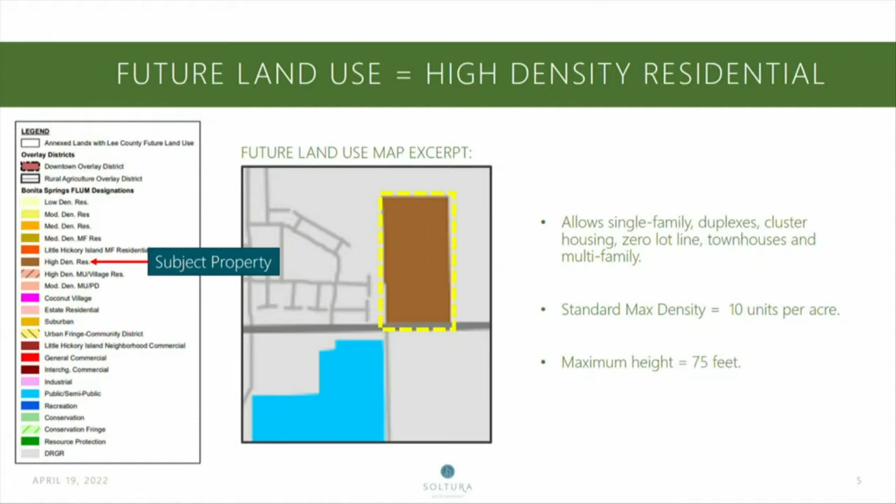The current zoning is Eagle Lakes RPD. It was rezoned back in 2008, allowing development of 200 dwelling units at 10 units per acre per the future land use designation, with a maximum height of 35 feet. You can see on the property there are a number of multifamily residential buildings along the west, north, and south property lines.

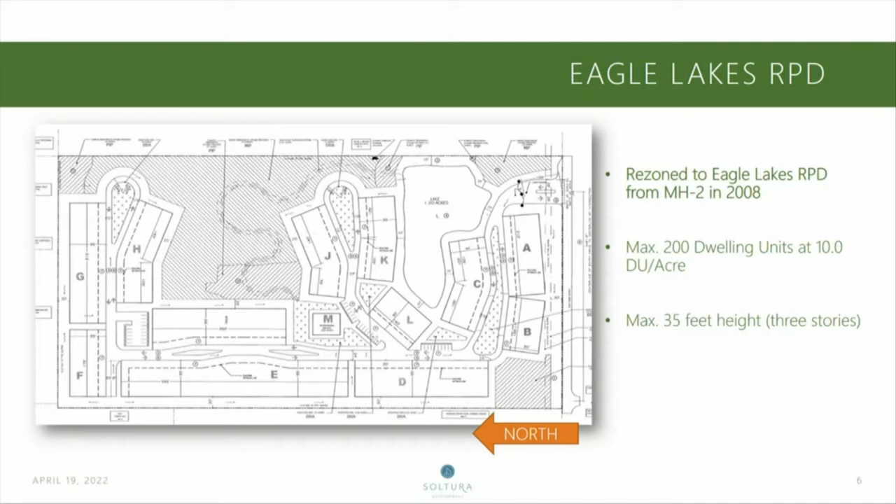Our request today does not include any increase in density or height. We're sticking to that maximum of 200 dwelling units and 35 feet, limited to 1 or 2 stories.

We're really just modifying the layout to accommodate this multifamily development and updating the site layout due to the nature of the development. We're including 4 deviations related to parking requirements, lake setbacks from the right-of-way, lake sinuosity, and perimeter setbacks, modifying the master concept plan to include these changes.

There are, we think, quite a few improvements in this master concept plan over the previously approved plan. We are requesting fewer deviations, so improved consistency with your land development code. We're providing for multiple points of access, and we're actually increasing the open space over the currently approved plan and improving the stormwater management for the site.

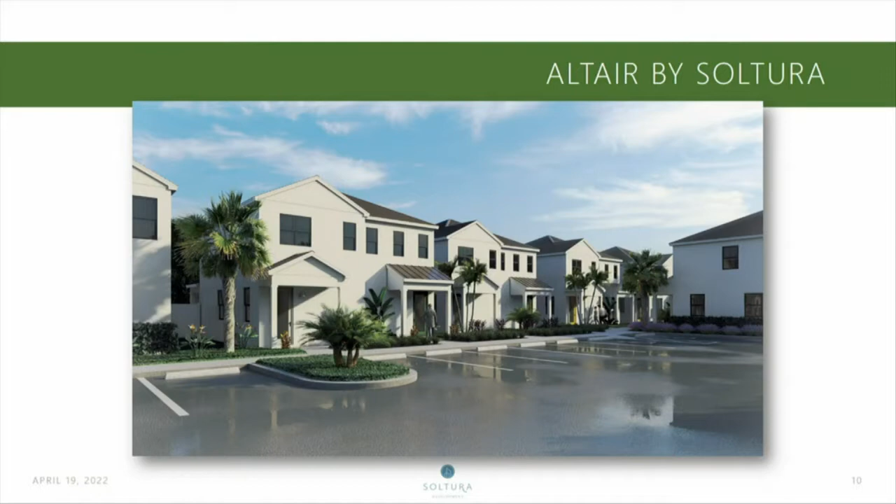Some examples that I'll run through quickly of other cottage apartments that Soltura Development has begun development on. Here is Altair by Soltura. You can see a couple of multifamily buildings.

Going through these quickly, again we're going back and forth between Altair and Odyssey, and you can get a sense for what this community will look like on East Terry as well.

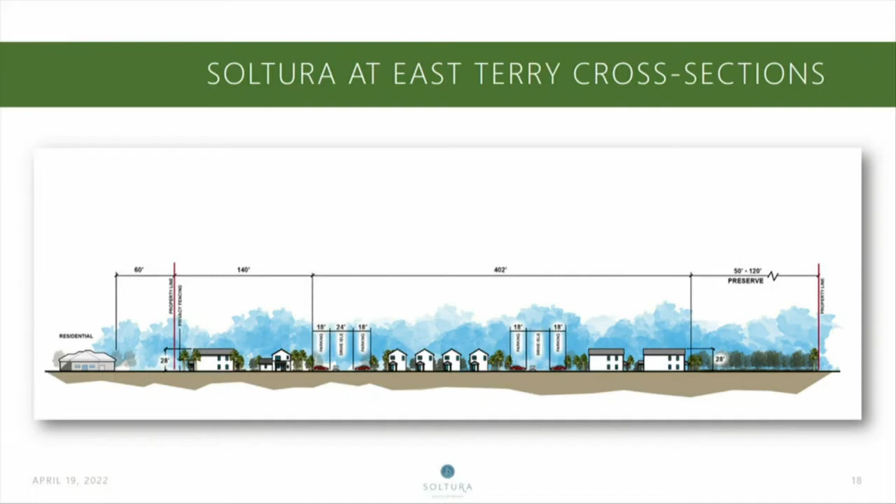And here you can see the same idea running north to south, so you can see where there is a buffer to East Terry, lakes in the southern area of the property, and then the home sites throughout.

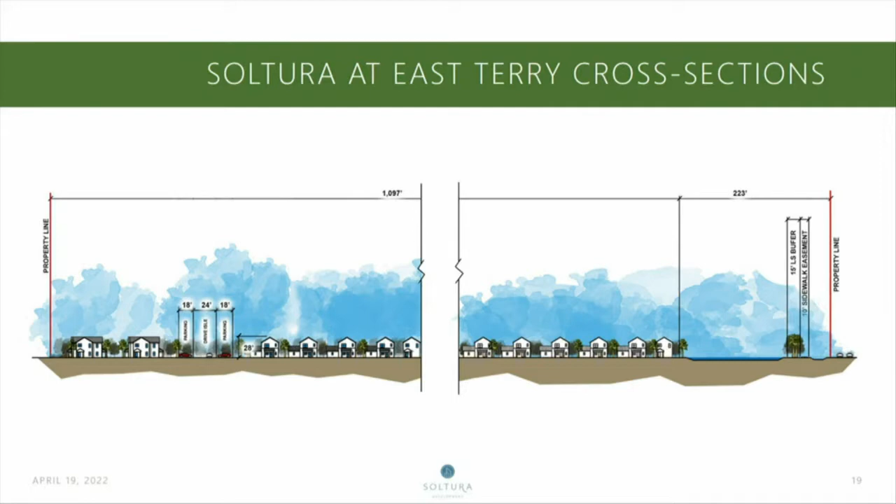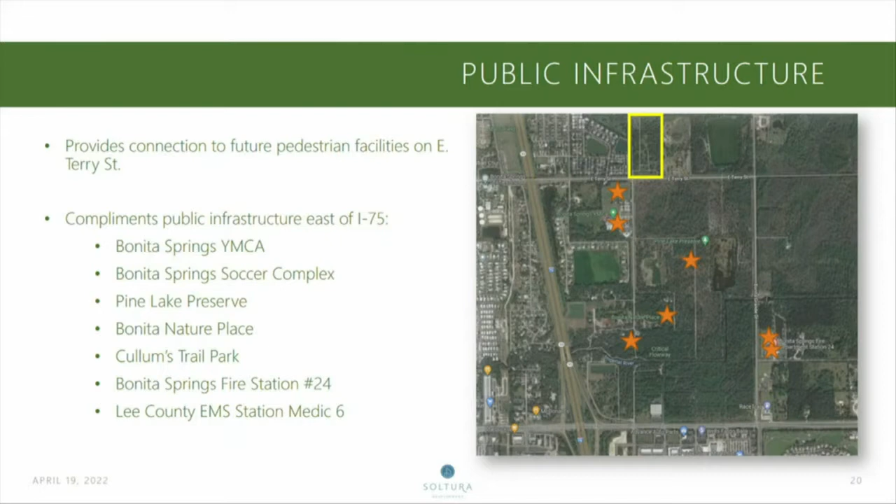The location for multifamily high density is pretty ideal here. You can see a number of public infrastructure sites nearby, including the Bonita Springs YMCA and soccer complex just to the south of the property. Pine Lake Preserve also to the south on the other side of Kent Road. Bonita Nature Place in that same area, and Cullum's Trail Park. The fire station and EMS Center are on Bonita Grand. And beyond the public infrastructure along Bonita Beach Road, east of I-75, there's quite a lot of commercial, office, non-residential development that this Soltura development will be able to take advantage of and utilize.

We held 3 neighborhood information meetings in August, January, and most recently in February at the Bonita Springs Fire Rescue Building on Bonita Grand. We had a few people at each meeting and received comments and questions about environmental considerations, traffic, and stormwater. We worked with those individuals and with staff to narrow down these issues, and I think you see that reflected in the agreement on most of the conditions between staff and the applicant.

So the only 2 conditions that we are not in agreement on, as Mike mentioned, are the traffic conditions. I'll run through a couple of slides that we had prepared, but I don't think we need to get to. If you have any questions, we can come back to these and skip right to those transportation slides.

And for that, I'll bring up Ted Treesh with TR Transportation. Good morning, Ted Treesh with TR Transportation Consultants. We prepared the traffic analysis as part of this application.

As you know, it's quite an extensive process we have to go through for the traffic analysis for the city. We have a methodology meeting and notes with the city that we exchange with the city's traffic consultant. We conduct the analysis and address comments that are issued by the city to get to this point.

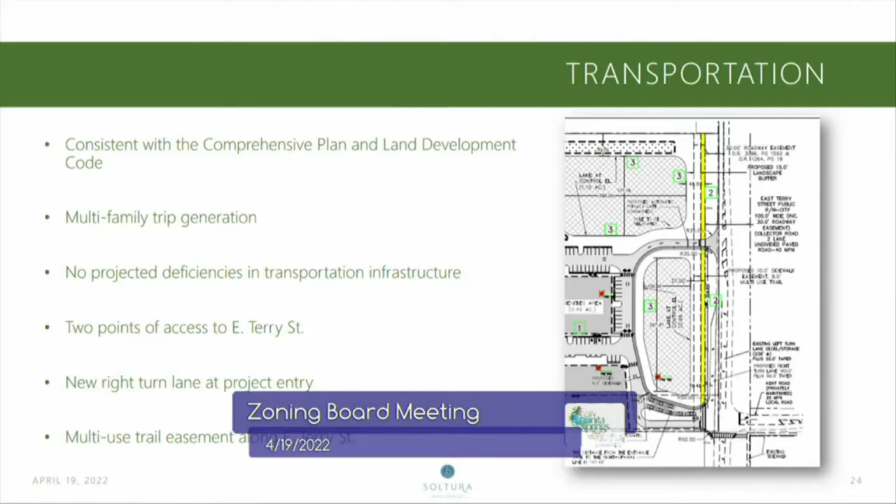As Jeremy indicated, this product is a multifamily product, it's your typically multifamily land use. What we utilize in doing our traffic studies is the ITE, the Institute of Transportation Engineers Trip Generation Report. That's what's generally accepted, that's what we've been using in the city for a number of years. We simply use the multifamily trip generation category for this land use. But because it doesn't look like a multifamily use, there were some questions raised by city staff on whether this is truly a multifamily project, and whether it will generate traffic consistent with a multifamily project.

Just some other points, as Jeremy indicated, there are 2 points of ingress and egress onto East Terry. The eastern access, shown at the top of the drawing, is an exit only onto East Terry, so residents only will be able to exit out onto East Terry. The entrance will be opposite Kent Road, basically creating the 4th leg, or the north leg, of the Kent Road intersection. As part of that intersection improvement, we'll be putting in a right turn lane on East Terry, so as you're coming from Bonita Grand, there'll be a right turn lane to utilize to enter that right turn lane and enter the site access drive.

It'll be a gated community, and we meet the stacking requirements of the gate per the land development code. Everything else in the application in terms of transportation, we're in compliance with the comprehensive plan and the land development code. In terms of impacts and level of service on the area roadways, we meet the standards as indicated in the staff report. The one real issue came down to, from a trip generation standpoint, is this truly a multifamily project?

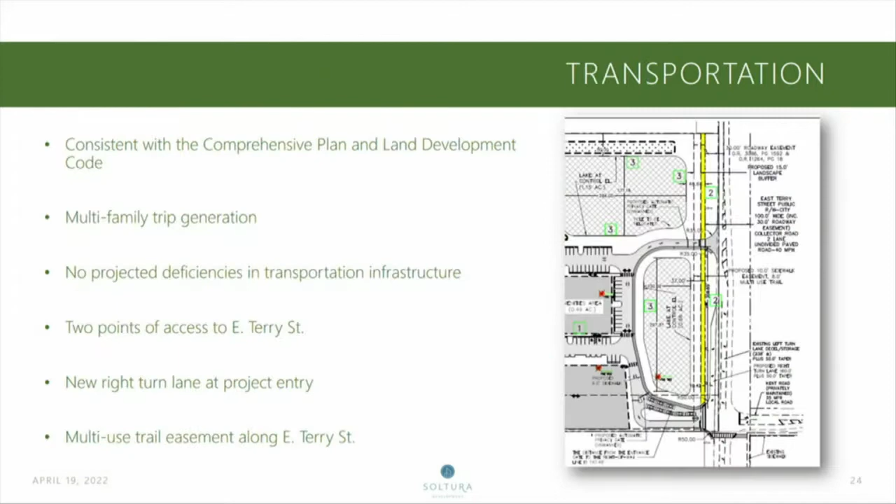So there are 2 conditions that were placed on the staff report that we're in disagreement with. The first is condition 5.

Let me just read what condition 5 says. It says, at the time of local development order, the applicant shall submit, along with the TIS, an intersection control evaluation study for the Kent Road, East Terry Street intersection. Again, at the time of development order, we have to do another traffic study pursuant to the codes of the city. We have to have a methodology meeting, again, with the city staff. At the time of DO is really when you know exactly how many units you're going to build, so it's a more specific analysis that can be done at the time of development order.

The intersection control evaluation study, commonly referred to as an ICE study, was developed by FDOT. You can see this is the cover of their manual, developed probably about 4 or 5 years ago, to look at projects on highways, roadways, and intersections going through improvements, specifically if you were looking at doing a traffic signal.

There's a number of different intersection design alternatives now available that have been looked at. There's roundabouts, there's what's called R-cut intersections. You've seen a number of interchanges being redone now with different configurations. So the ICE manual was the direction by FDOT that before you install a traffic signal, let's evaluate other options to see if anything is a better option for an intersection.

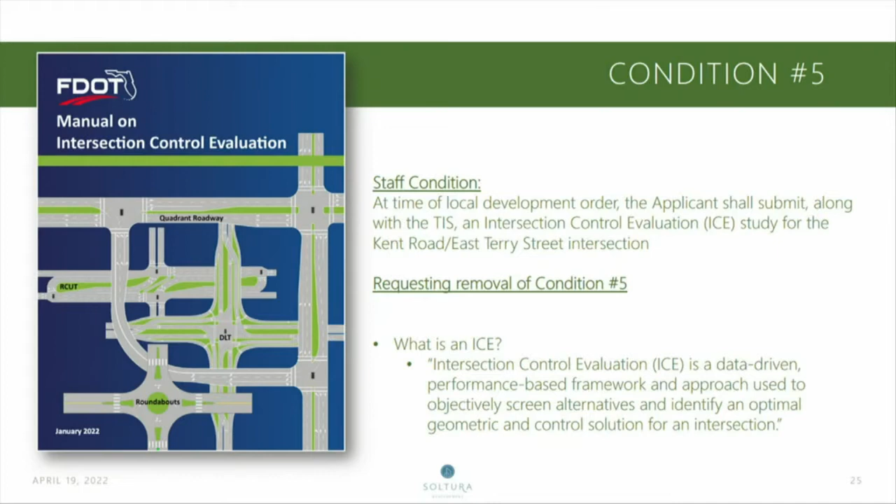It's very data intensive. These are just some of the analysis sheets that go into looking at what an ICE evaluation is. There's quite a number of factors that go into an evaluation. There are several steps you look at. Once you get through one step, you look at going into the next phase, depending upon the results of the analysis. In terms of the requirements currently in place in the city for a development order, in my opinion, this would more than double the requirements of what this applicant would have to go through.

Which intersection? This is at Bonita Grande and Kent Road. Sorry, I mean East Terry and Kent Road. That's very confusing. East Terry and Kent Road. You've been talking about Bonita Grande, and what we're actually talking about is Kent Road. I'm talking about East Terry and Kent Road. If I mistakenly say Bonita Grande, I apologize.

May I understand that your main objection to meeting this condition is that it's going to require extra work on your part? It's quite a bit of extensive extra work that's not required in the current codes in terms of what a TIS has to evaluate at the time of the development order. So basically, it's just extra work.

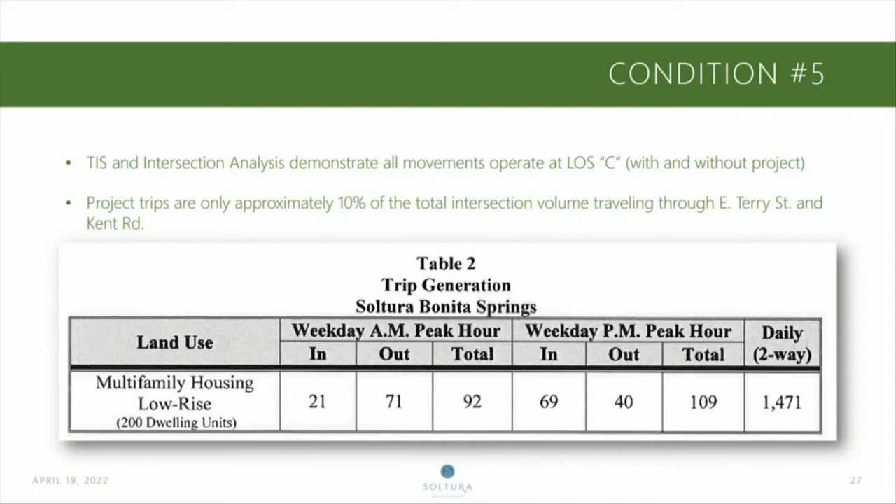Again, these are just some of the spreadsheets you look through. The second issue was regarding trip generation for the project. Our analysis showed the intersection of East Terry and Kent will operate at level of service C. All movements will operate at level of service C, well within acceptable methods and operational analysis. This table shows the trip generation of the project as a whole based on the multifamily use. It's a very low trip generator compared to other uses, even compared to a single-family product.

In order to alleviate some concerns staff had regarding trip generation, this goes to condition number 6, which we also have an objection to. Condition number 6 says at the time of local development order, the applicant and the city will agree on appropriate traffic monitoring provisions. We're not quite certain what those appropriate provisions are. The codes adopted by the city right now don't have any such requirements, so this condition is being put on this project.

The only other project I'm aware of with something similar was the recent approval of the facility next to the card room, where the dog track was taken down. With the entertainment facilities going in next to the card room, that facility was something new and we didn't have any trip generation data for it. I did the traffic study for that project, and there was no such trip generation data because there's no facility like that in the country. So it was first of its kind. The city put a transportation monitoring condition on that project because we simply didn't know the trip generation characteristics of that type of use.

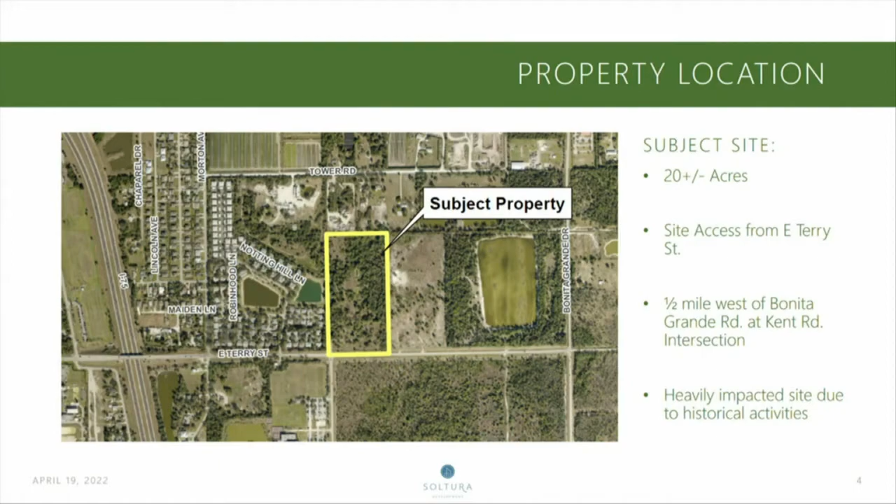So did I hear you say that this is only going to increase traffic 10% at that intersection? Our project is approximately 10% of the total intersection volume at East Terry and Kent Road. Well, who else is using the intersection if nobody lives out there?

Can I interject here? Yes. If you go East Terry, cross over Bonita Grande, there are several homes out that way.

There's a horse farm out there, so there are some residents out there east of that. On East Terry is a dirt road. Some large acreage, some other homes out there, very small though, sparse. It's not a development, just a whole lot, you know.

To answer your question, the volume on East Terry is primarily commuter traffic from the east. Logan Boulevard connects now to Bonita Beach Road. They come to Bonita Grande north and use East Terry to travel west to get to downtown Bonita, Old 41 corridor.

Can I make another comment? We own the church out there, about 8 acres, and we have our office out there. As you're saying, the volume that's coming in is from all that development east of Bonita Beach Road, and they have found a little shortcut. So that's where that volume's coming in. Instead of going straight down Bonita Beach Road, they go down to Bonita Grande, make that little shortcut, East Terry, hit Imperial that way. So you got this line of traffic, especially in the morning and evening.

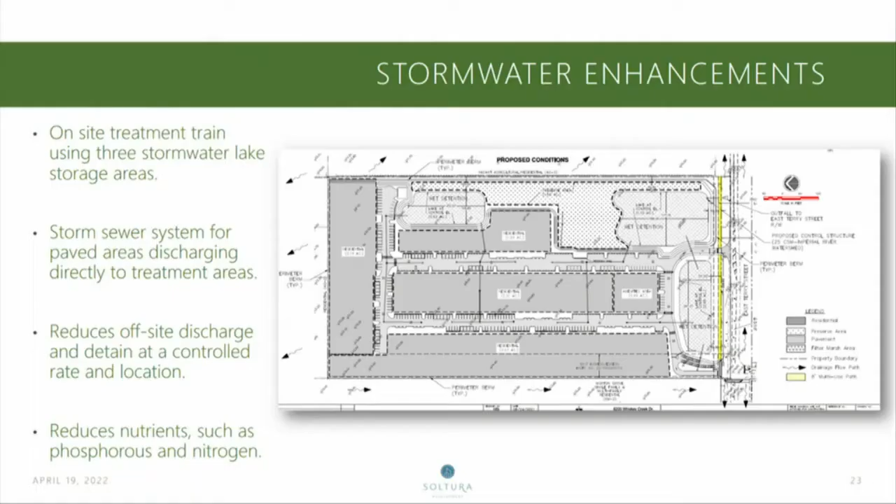And the other note that I had in regard to that, the parking spaces per dwelling unit here is 1.89. So 1.89 parking spaces per dwelling unit. And in Lakewood Ranch, which you talk about a lot, there are 2.8 parking spaces per dwelling unit. Why do you have such a big difference?

It's code driven. So again, the multifamily code in Lakewood Ranch is different than the code we're dealing with. What I gave you is the City of Fort Myers code, which is what I'm doing in the city right now. It's also the Lee County code. I think the city has adopted Lee County codes, but I don't know offhand, so I'm going to guess.

But you just said, what, 1 point on average? So basically what that means is you take a projected mix of homes, 1s, 2s, and 3s, and you come up with an average. So I think our current projection based on the master concept plan gets you to that somehow, some way. So I was going to point, but I don't have a pointer.

You don't have a laser pointer up there? No, I don't have one up there. Where's our audiovisual committee? So these are garages, okay? You may choose to rent a garage here, but you may live back over here. It's an apartment community, just like what you see. I'll use Mosaic as an example. I think they've sold it.

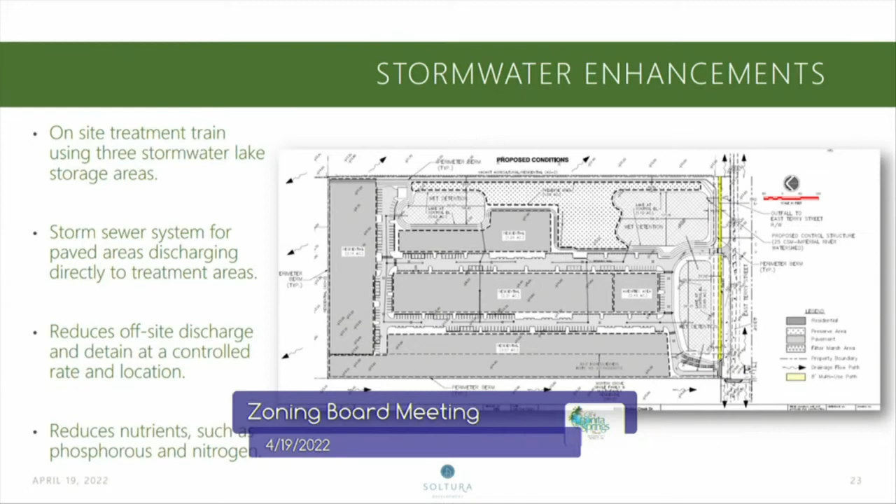It's no longer Mosaic, but everybody's familiar with it, right down the street on Old 41. Okay, so where those white structures basically are. Okay, thank you. Was it the top button? Thanks. Okay, that's great. Okay, I'm back. I was thinking those are islands.

But does that help answer questions? Does anybody else have questions? I know this is a new product, so if there are specific questions... I know you also don't see the sidewalks, and that's because the LDC doesn't require sidewalks internal other than to get to the common space from the outside.

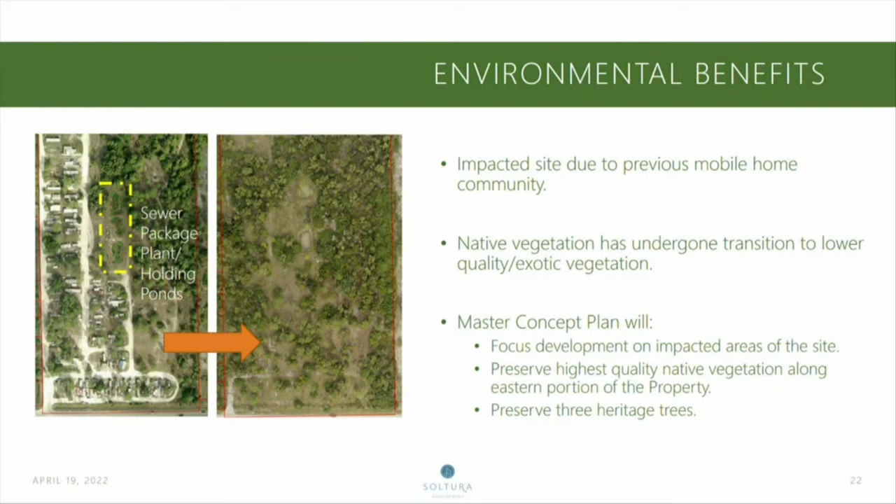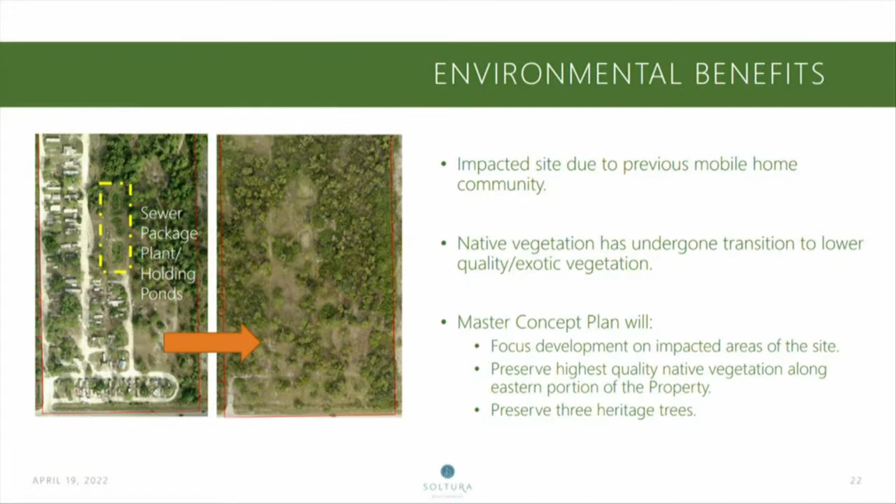Correct. Did I see something about tortoises? Gopher tortoises? I don't know if we have that online, but we will be complying with state and federal requirements for listed species that exist on the property.

Are you finished with your presentation for the entire project? Yes. Okay, I have two pages of questions. For them or for the city? Perhaps for both. Okay, staff can go first. You proceed, you might get your questions answered with the staff. Let Mr. Galloway ask the question in the appropriate way and the applicant will answer. I think the staff should go first and recommend if you have questions for both, whether answered by staff or at the end, it's easier for the appropriate party to respond. You want the staff presentation and then questions? Okay, all right. We'd just like to reserve the right to rebut. No one's gonna stop you. Okay, Mr. Fegan?

Good morning, Mike Fegan again for the record. I will go through a very brief— I think this is mine. Nope, wrong one, sorry about that. Did we break it? No, you didn't break it. There we go, and now I can't see where I'm going. Okay, Mike Fegan with Community Development for the record.

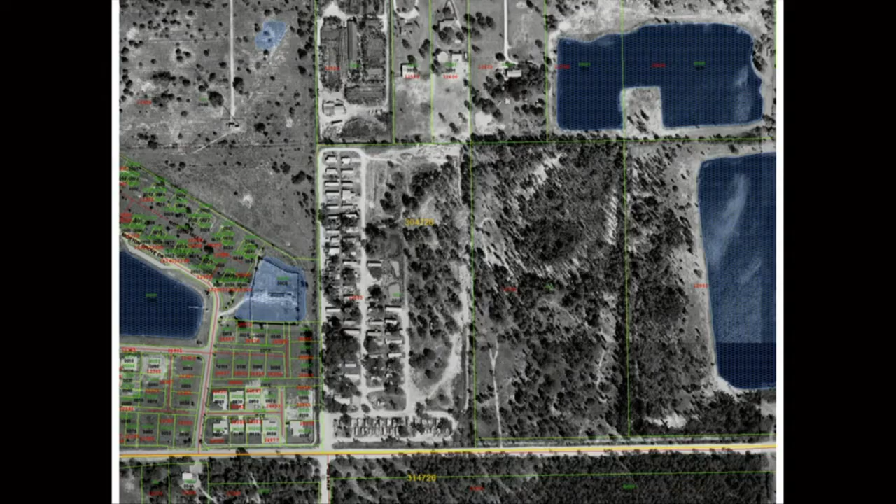And we already went over the master concept plan, but what I want to do is I want to jump to one more slide and show you the proposed master concept plan next to what was on there previously. So to the applicant's credit, one of the things you can see is they're trying to focus the development largely on the areas that were already impacted by the mobile home park. So you can kind of see where there's a natural progression along the south, the west, and towards the middle of the project where the mobile homes were, and that's largely where they're placing their buildings.

You can see on here that the eastern portion of the property was left relatively open and vacant, and that coincides with where they're proposing to put their indigenous preserve area and some of their stormwater management lakes.

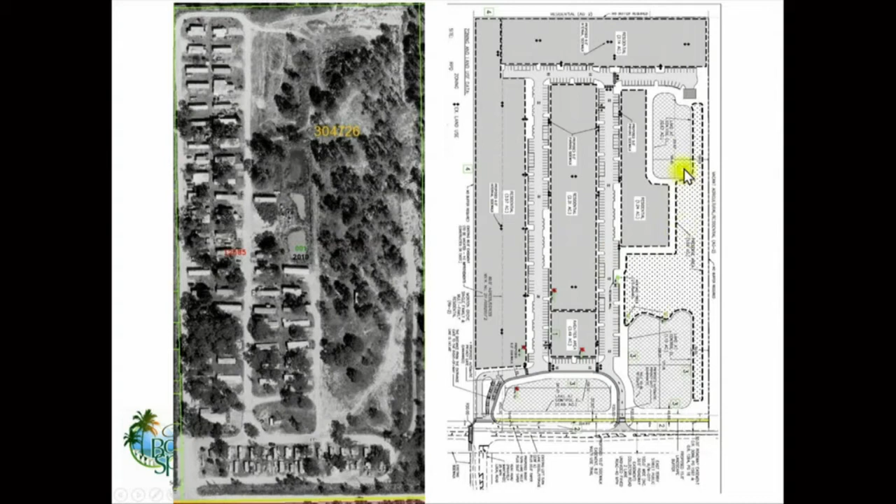With the schedule of uses, I don't think there's really any concerns on that specifically. The uses tend to be customary to most residential developments that we have in the city. The multifamily detached, which is what they're calling this building product, that is a new one for the city. We did ask them to provide a definition for consideration for exactly what that entails. And I think part of the concern stems from the definition that was provided. While we understand it, I think it still led to some confusion about exactly what type of project this was going to be, and as a result of that, what type of traffic it ultimately would generate.

The development regulations are listed on your master concept plan. We don't have any concerns with those development regulations. There is a deviation that has to do with one of the parking regulations that staff did analyze and is recommending approval on, which we'll get to later in the report.

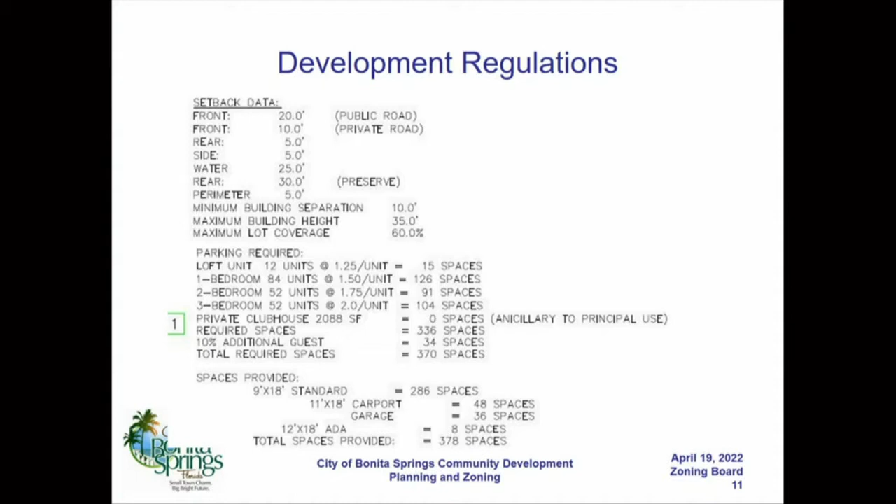With regards to stormwater, part of their 4-page master concept plan does include a proposed stormwater exhibit. And now again, at this stage, at the zoning stage, it's relatively high level and conceptual. The more detailed plan will be provided at time of development order, which is when they provide their final engineering plans. But the overall concept was reviewed by the city's engineering department, and they didn't have any concerns with it. It's going to be designed to treat and hold stormwater on site and discharge at the appropriate rates based on South Florida Water Management District codes and requirements.

And one thing just to keep in mind, because I know at one of the neighborhood meetings there was concerns about stormwater and drainage, which is fine. That seems to be a relatively standard concern with most projects in the city. We do have a requirement that this project cannot cause additional stormwater runoff onto surrounding properties. So where Morton Grove is directly to the west, the water that they receive right now, the water that flows through that property, it cannot increase as a result of this property.

So we do have mechanisms in place that look at that in a more detailed approach at the development order phase. So I'm asking this early, when the ponds fill, when the retention areas fill up, where does the runoff go? Knowing that it doesn't go into surrounding properties, where does it go from there? So I believe based on their stormwater plan, it's going to discharge into the East Terry Street right-of-way. That's its discharge point based on the interconnected channel and pond routing system that we have for the city. It's already in place. Yes.

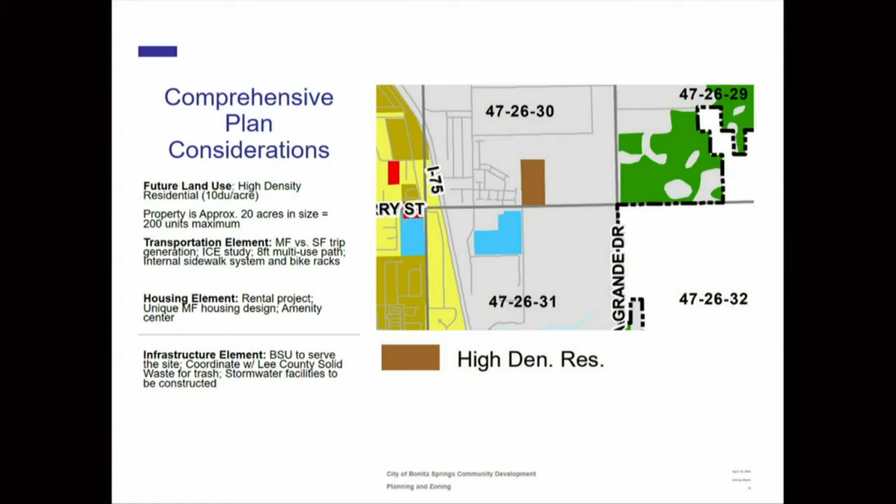For the infrastructure, BSU is going to be able to serve the site with water and sewer. There will be coordination with Lee County Solid Waste for how to do the solid waste removal on site. The other infrastructure element is the stormwater facilities, which they are going to construct in accordance with city regulations and South Florida Water Management District. So we do feel it demonstrated compatibility with all those necessary areas of the comprehensive plan.

With regards to the deviations, there were 4 that were requested. Staff is recommending approval of 3, and we are recommending that one of them be withdrawn. We don't think it's necessary at this stage, but we'll quickly go over those.

Deviation 1 has to do with the parking rate for the amenity center, which is similar to how we park recreational facilities at 1 parking space per 100 square feet of floor area. Their justification was that the site is relatively compact and walkable in terms of the overall design, and because they're providing the interconnected system of sidewalks and many residences are within walking distance to the amenity center, is the amenity center parking rate really necessary at this point?

Staff reviewed it and does recommend approval of that deviation request. We tend to agree that the site is relatively compact in terms of the overall design. On a square mile basis, it's actually less than half a square mile of development area, so it tends to be very walkable. We do have a condition that we want to see additional bike racks placed throughout the development to foster not just walking, but also biking to and from the amenity center.

Yeah, I have a question. Oh, excuse me, quick question. Handicap parking—is that a federal rule, is it applicable here at all?

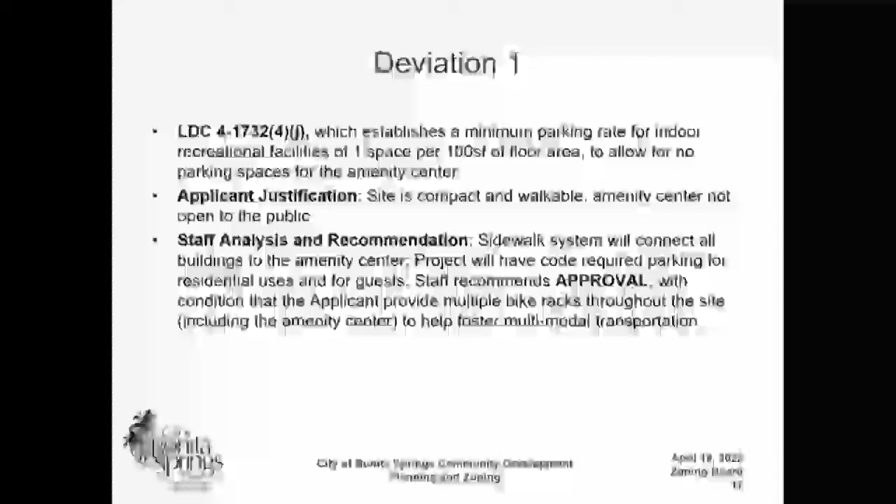Sure, it's done in accordance with ADA, and essentially what ADA says is based on the number of spaces you provide for a project, a certain percentage of those have to be ADA compliant. They don't have to be at the amenity center—they'll be scattered throughout. When they submit their final parking design, we'll request that they put some by the amenity center, per their standards, closest to the main entrance and things like that. It'll all be reviewed as part of the development order, but they're not asking for any deviations or variances from the ADA parking considerations.

Deviation 2 is a deviation from Chapter 3 Standard 3-331, which requires a 50-foot setback from land under separate ownership for lakes or stormwater areas. They wanted to request a deviation to allow just a 25-foot setback from Terry Street.

The justification is that the lake will still be buffered from passing motorists—there's not going to be any real risk of conflict between an errant car and the lake. There are buffers, existing drainage swales, and plantings being proposed. Staff understands and tends to agree with that analysis. However, this is a technical deviation that typically occurs at time of local development order, so asking for it now at time of zoning may not be the most appropriate time. Typically this comes with the final development plan, the final lake cross-section plans, the final drainage plans—the final plans that show the location of the lake specifically. We feel that's a better and more appropriate time to ask for a deviation like this, and that's what the code suggests as well. It's why it's written into the code that way, that you can ask for these types of deviations at time of local development order. So we feel this one could be withdrawn, not because we disagree with it or see an issue with it—we just think it's the wrong time to ask for it.

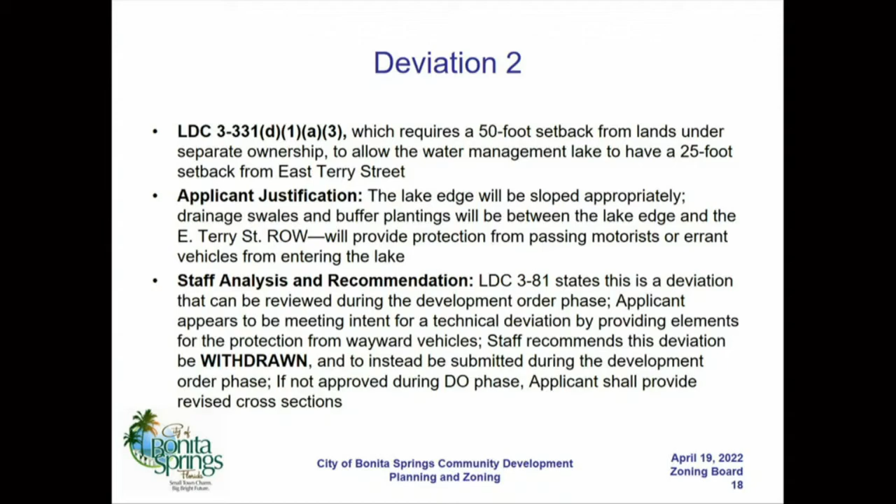But there's a 50-foot setback east, north, and west? Yes, they are meeting that east, north, and west, correct. Thank you. You're welcome.

Deviation 3 has to do with lake sinuosity—the waviness of a lake bank or shoreline as opposed to a straight line. The purpose of sinuosity is to help maximize the amount of littoral plantings you can plant along a lake bank. These plantings have multiple functions for the health of the lake: they filter out nutrients before discharge off-site, and they help prevent lake bank erosion from moving further back toward residential areas. A sinuous design allows you to physically plant more littoral plantings than a straight line would. What the applicant has agreed to do, in lieu of a sinuous lake, is still do sinuous littoral plantings—making the lake bank appear sinuous by planting in an undulating pattern with littoral plantings and grasses.

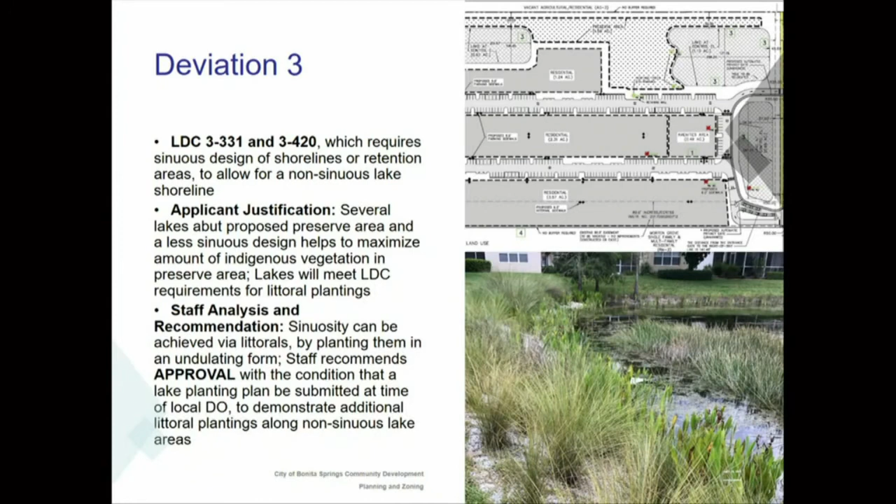As you heard in other projects in the past, these tend to be very, very precise calculations in terms of the amount that each lake should hold compared to the discharge rate of where it goes to its ultimate discharge point. Essentially what they're saying is the design they've come up with is what keeps their stormwater plan in balance. Not to say that that's an unreasonable question, but from the staff perspective, they can achieve the same thing without messing up their stormwater calcs by just planting additional littorals, which they've agreed to.

So do you think that these straight littoral lines are going to contribute to erosion? I mean, that's the purpose of the sinuosity, to prevent erosion, correct? Part of it, it's to allow you to be able to plant more littorals. The littorals are what ultimately help prevent the erosion. So the littorals are still going to be there. But I mean, this planting is not going to encourage erosion?

Correct. And the littorals will be planted in an undulating sinuous pattern to allow more of them to be planted in areas where the lake tends to be a bit more straight. I'm having a problem picturing that. I've got a straight line and then my plants are doing this?

Yeah, I mean, you can kind of see it in the image below where essentially it's a straight line here, but you have plants that kind of jut in and out. In fact, they planted 3 different layers of littoral plantings here to help achieve that same effect of erosion and nutrient control. The purpose of this provision is to, quote, increase the length and diversity of the littoral zone. Right, okay?

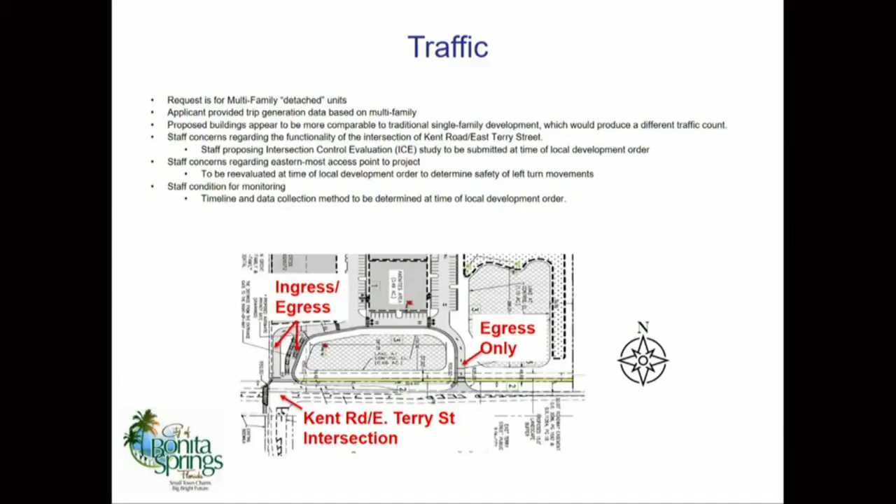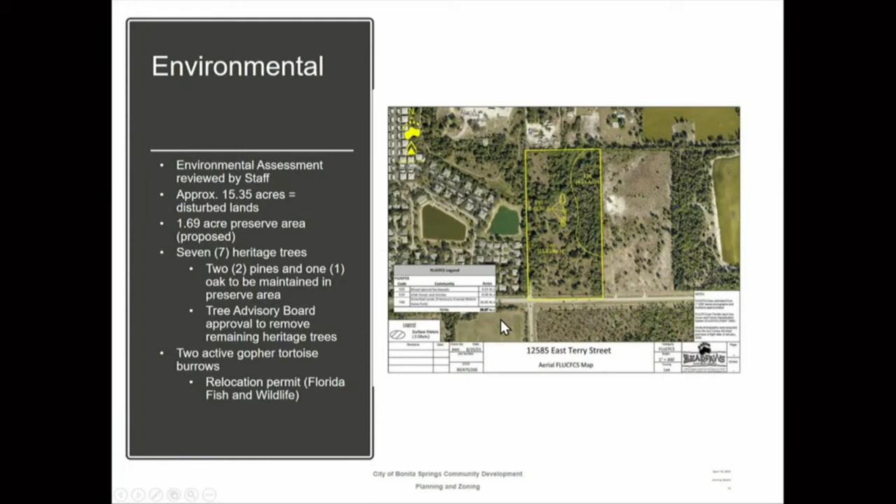Okay, deviation 4. Deviation 4 has to do with perimeter setbacks from a project boundary of 15 feet, and the request is to allow a 5-foot setback on the northeast and west sides. Essentially what's being proposed is that they're trying to develop within the previously impacted 15-acre portion of the site that held most of the mobile home development, the package plants, and the ponds. In order to do that, based on where their proposed conservation and preserve area is located, they're somewhat squished on two sides, especially the north and west, in terms of where they can put their development overall.

Largely this would be for accessory structures, fences and walls. What the applicant is proposing is that if any principal structures are within 15 feet of the boundary, they would provide additional plantings and landscaping to help visually screen the project from abutting properties. When you look at the surrounding properties and how close they're able to build to their property lines, for many of them it's within 5 feet of that common property line anyway. So we didn't see it as an inconsistency to allow development within 5 feet of a shared property line when the person on the other side can do the same thing.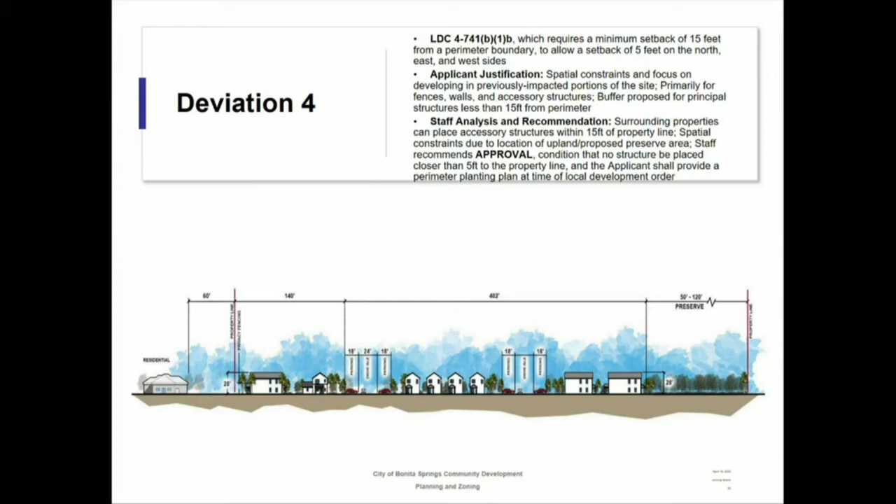We did want to stipulate that it's not just for principal structures per se—anytime anything is within 15 feet of the perimeter, additional plantings will have to be taken into consideration. At time of development order, they'll have to provide a planting plan showing how they'll treat and address perimeters where structures are less than 15 feet from the property line, once they have their final drawings in place.

So with that, we go to the plan. Hang on.

You lost me—Deviation 2 says we need to stay 50 feet away from the property line we share with somebody else. That was for stormwater lakes, a separate deviation just for lakes. Now we're talking about structures, the buildings themselves, being 5 feet away from the property line—mainly fences and walls, but where there are principal structures less than 15 feet, they'd propose additional plantings to screen. Staff's retort was, you're going to do it for anything within 15 feet of the property line.

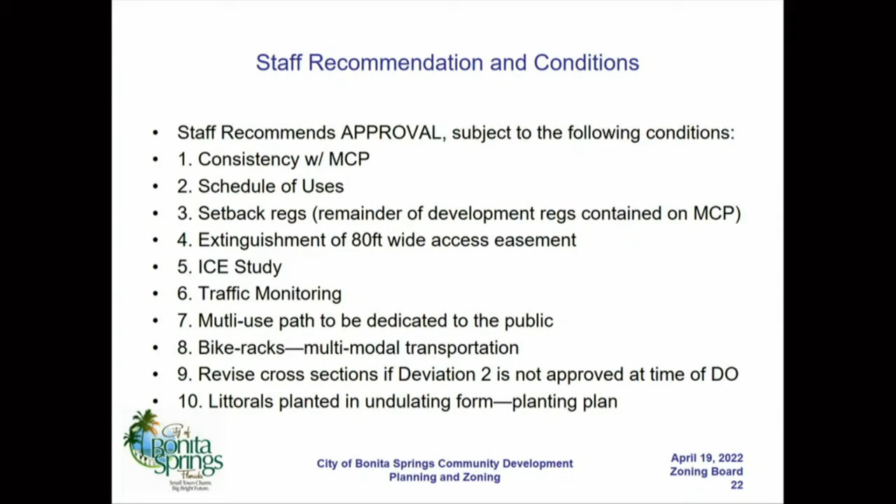Condition 11 has to do with the 5-foot perimeter setback, where they would need to provide a planting plan for anything that is within 15 feet of the project perimeter boundary. Condition 12 has to do with the heritage tree replacement and the ratio for how to deal with the heritage trees that are being removed.

Condition 13 essentially says, unless approved by deviation or variance, you have to meet the city's bike ped code for bicycle pedestrian requirements. And condition 14 says that approving this zoning request does not guarantee development order approval. It does not guarantee building permit approval. It does not circumvent those processes.

So with that, if you have questions for myself or the applicant.

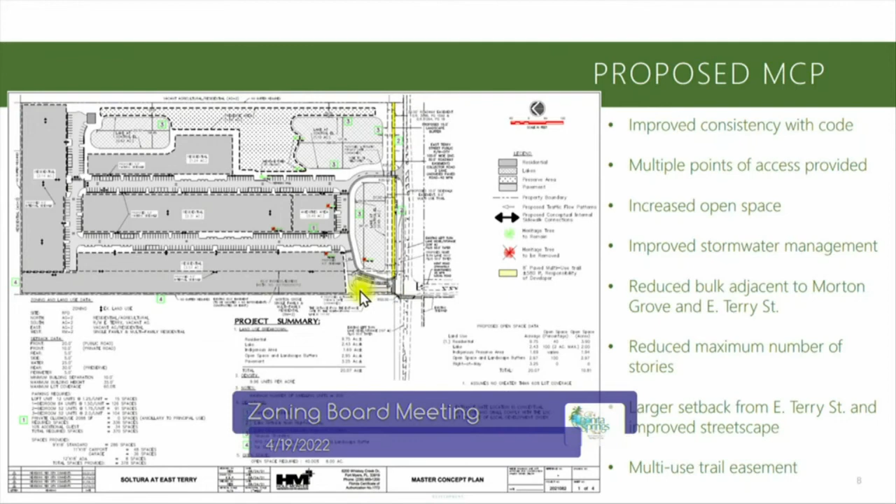So it's quite small here, but if you can see in your packet, there is a depiction of some vehicles there. At the time that we come in for our local development order, there will be an analysis of the queue length that could occur there, and we'll be required to demonstrate that we comply with the land development code at that time. Okay, but we don't have that now. We have not done a queue analysis at this point, no. That will happen at the local development order. Okay.

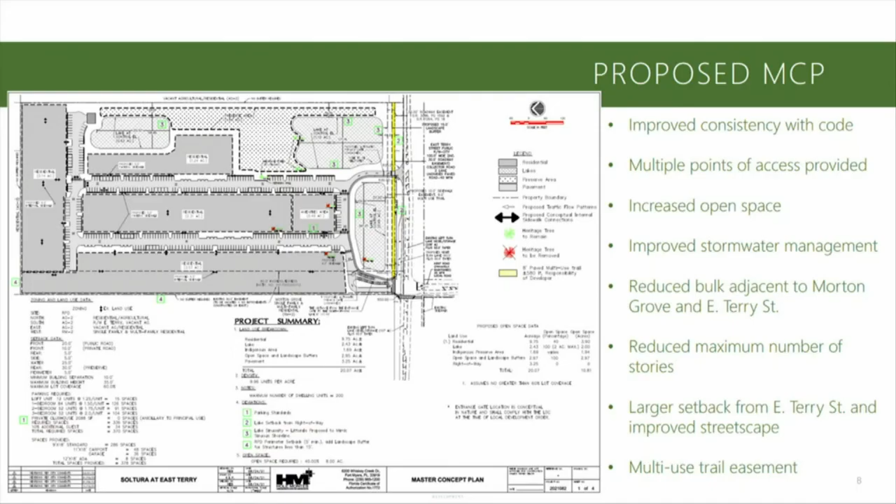Okay, answer the easement question. Is this a site plan? Or can you see it or not? Can I approach? Sure. Is that a site plan that shows the individual houses and access?

What page you got, Bruce? What page is that? I can't remember where I found this. It was in here somewhere.

But the purpose of your question on that is? This is the first indication I've had in all this material of where the houses actually are in relation to each other and in relation to the streets and the parking. It's the only illustration I've seen. It appears to be a site plan, an illustration of what that layout might look like. It's not anything that's been formally submitted to the city.

So the houses are not, no common walls. They showed a picture of a rendering of the houses. And that's what they would look like if all goes according to plan, correct?

Mr. Galloway, the plan that you're referencing was an exhibit that the applicant provided at one of their neighborhood meetings to give the public an idea of one of the concepts for how it could ultimately be developed. I think one of the things they're a little unsure of is what the ultimate final design is going to be, which is why on the master concept plan you see the building areas more as general block-looking patterns as opposed to individual residences. One thing they are more sure of, though, is the overall architectural theme, which is why they provided those elevations for your consideration. But the plan you're referencing was purely an illustration at the neighborhood meeting.